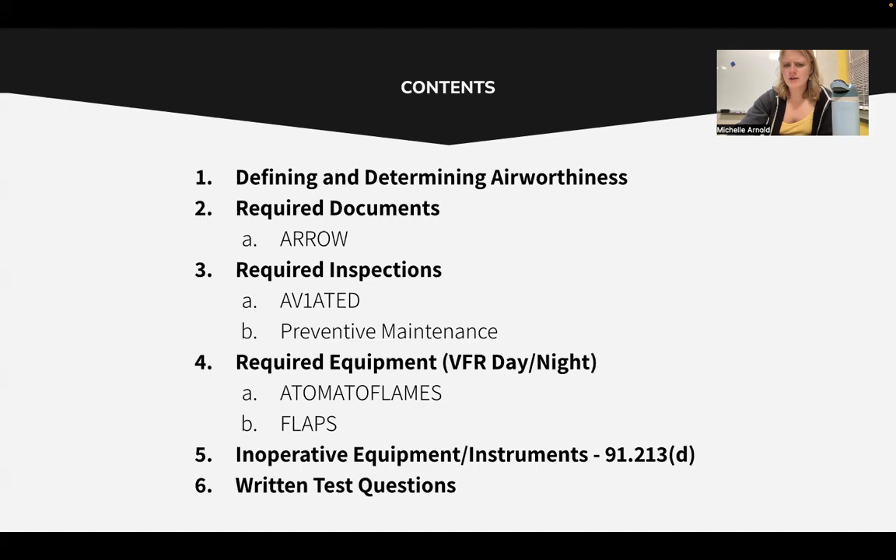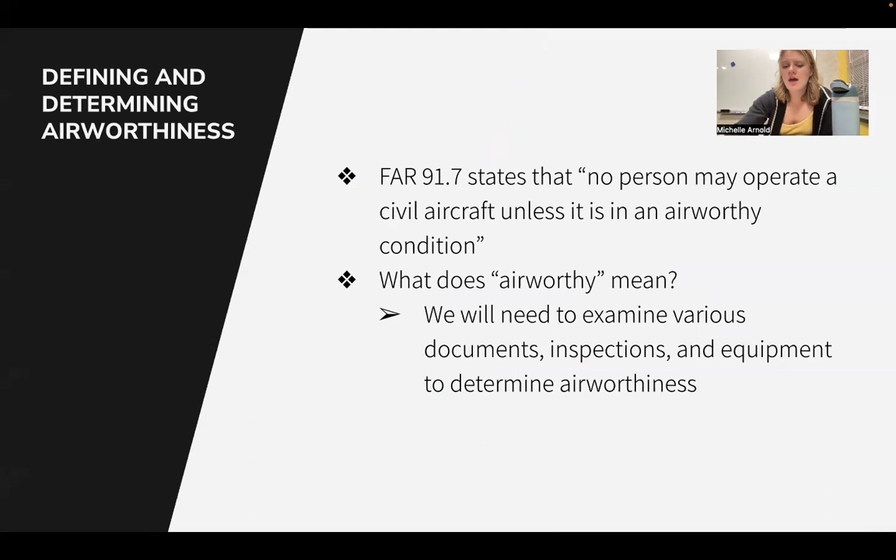All right, so defining airworthiness. FAR 91.7 says no person may operate a civil aircraft unless it is in an airworthy condition. So what does that mean to be airworthy? It pretty much just means that your aircraft is safe to fly and it's complying with any type certificate, things like on your type certificate data sheet.

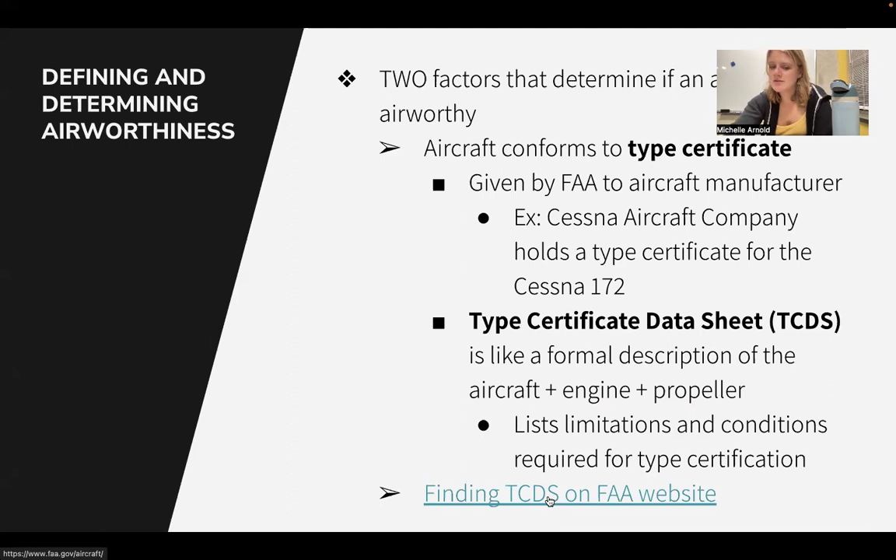So to find your type certificate data sheet, you can go to the FAA website. Click on this link, scroll down to technical information, and you have this link here, type certificate data sheets. Click on that, go to TC holder. We're going to choose Piper because we're going to find the Piper Archers that we use at Purdue. We are the PA 28-181. I'm going to click on that, click apply, and then it's right down here. You can click on that.

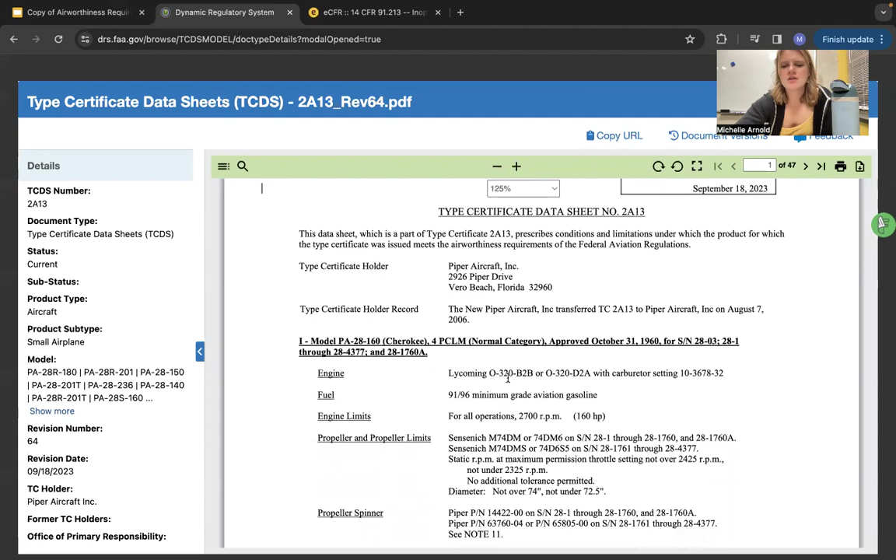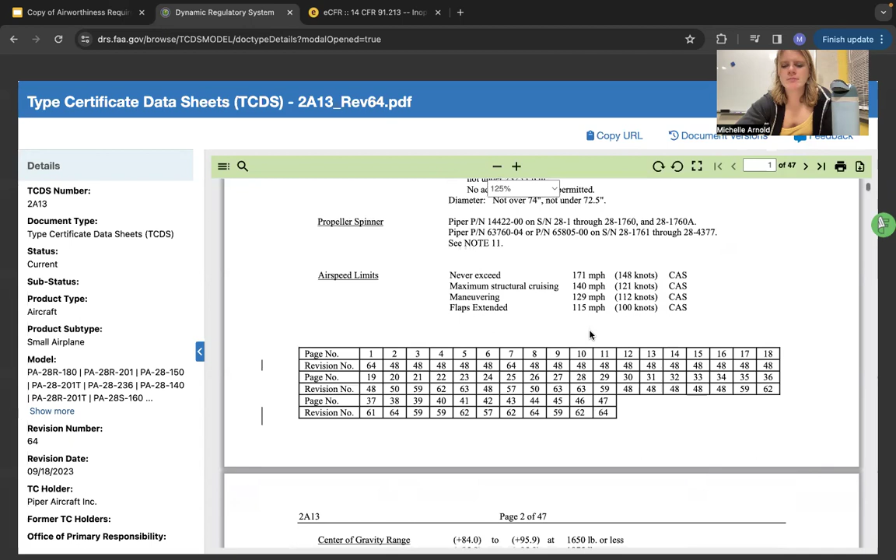And this will tell you everything about the aircraft and what you need to comply with. So we've got a Lycoming, horizontally opposed 320 B2B. Got all of our V speeds.

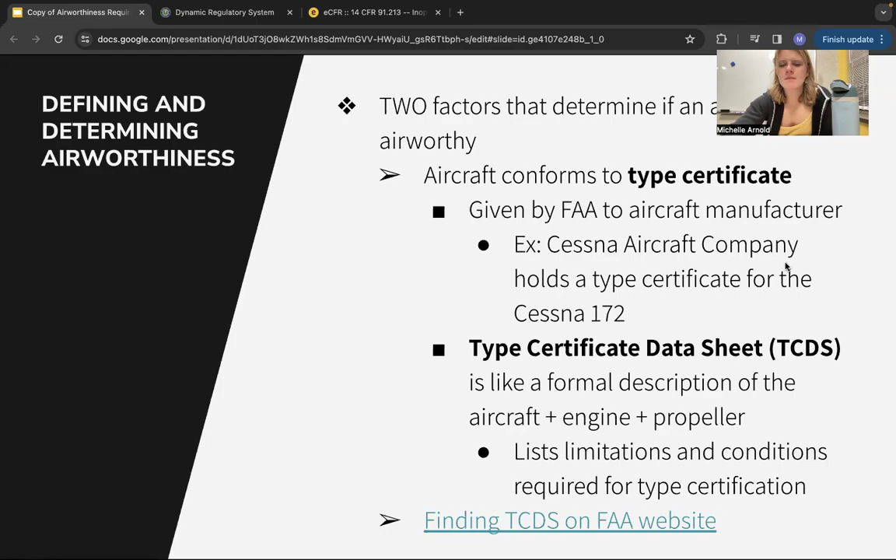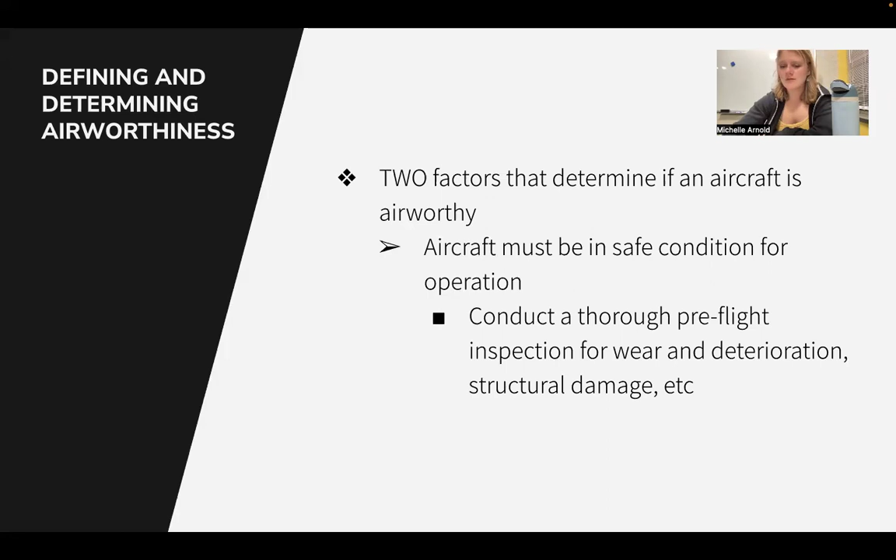So the two factors that determine if an aircraft is airworthy: it must be in safe condition for operation. So do a thorough pre-flight, make sure you check everything, follow the checklist that Purdue gives you, and make sure there's no damage or anything wrong with the plane. Make sure there's enough oil, enough gas.

And then the person responsible for maintaining the airworthiness condition is the operator and owner, but the pilot in command is responsible for ensuring that it is safe. So doing the proper pre-flight, the pilot in command shall discontinue the flight if it is unairworthy.

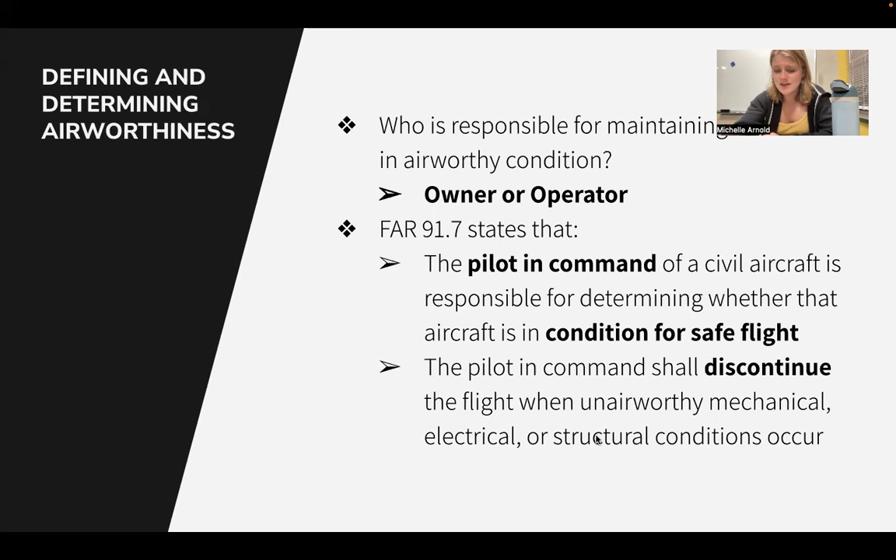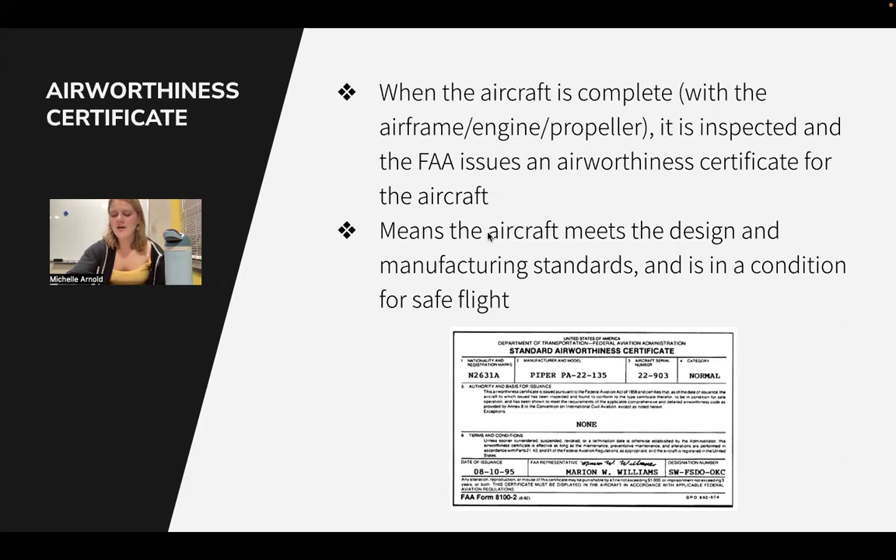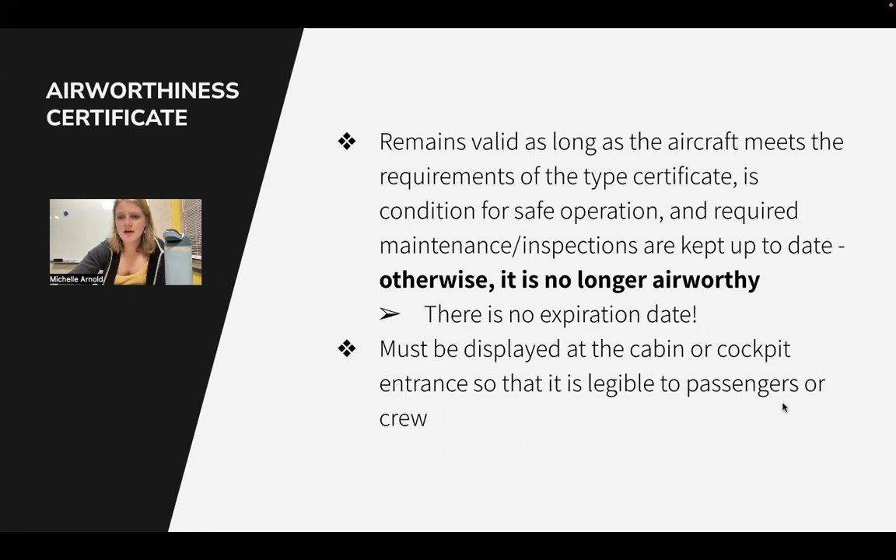All right, so the airworthiness certificate. This comes with each aircraft. It means the aircraft meets the design and manufacturing standards and is in condition for a safe flight. So each aircraft will have one of these and it does not expire. It's good for life. If you don't have it, the airplane is no longer airworthy. And it has to be displayed in a position that both the passengers and crew can see it.

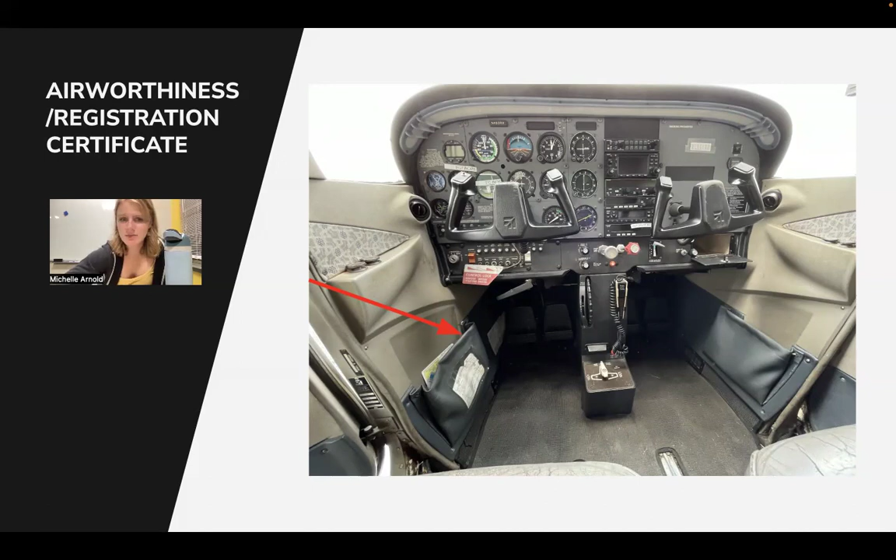Your radio station license. So we don't really need to worry about that because we are not going to be going outside of the contiguous 48 states. But if you are, you will need a radio station license. It's issued by the Federal Communications Commission, so not by the FAA.

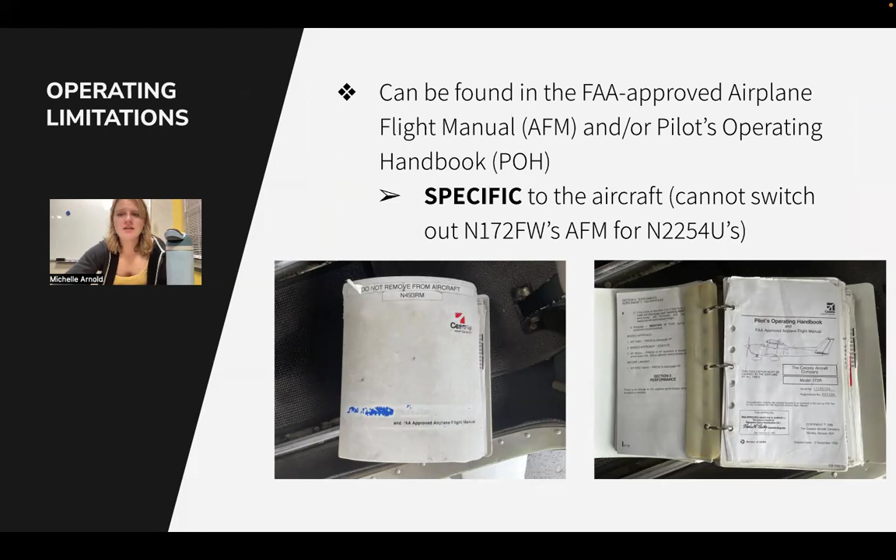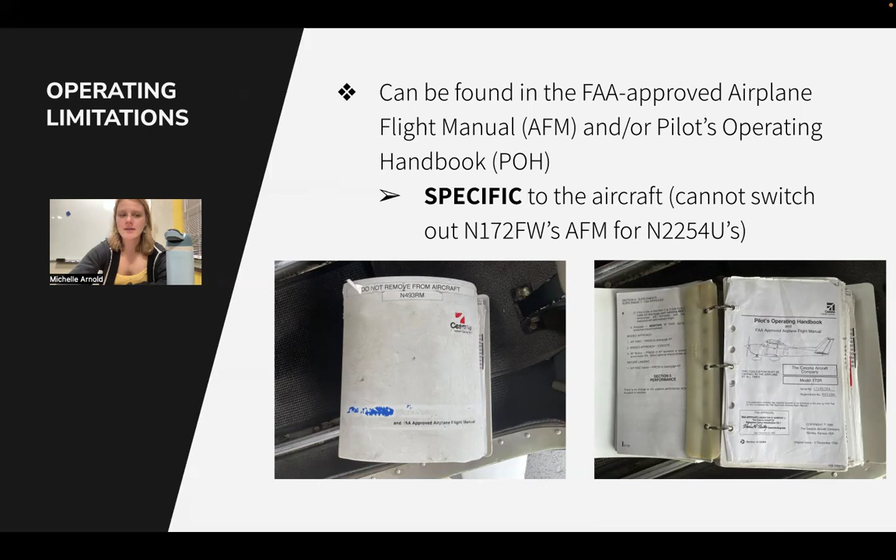All right, so your operating limitations. These can be found in an FAA-approved airplane flight manual or the pilot's operating handbook. Ours is probably going to be in the pilot's operating handbook, but this is specific to the aircraft. This is why Larry doesn't like to hear operating manual, because say the Piper's POH is on the website and that's the same for all Purdue planes, but the operating limitations are going to be a little bit different for each specific aircraft. So you can find all of these in the plane, in the binder, in the back seat.

All right, weight and balance data. That's our W. This again is going to be very specific for all aircraft, and that can also be found in the back of the binder.

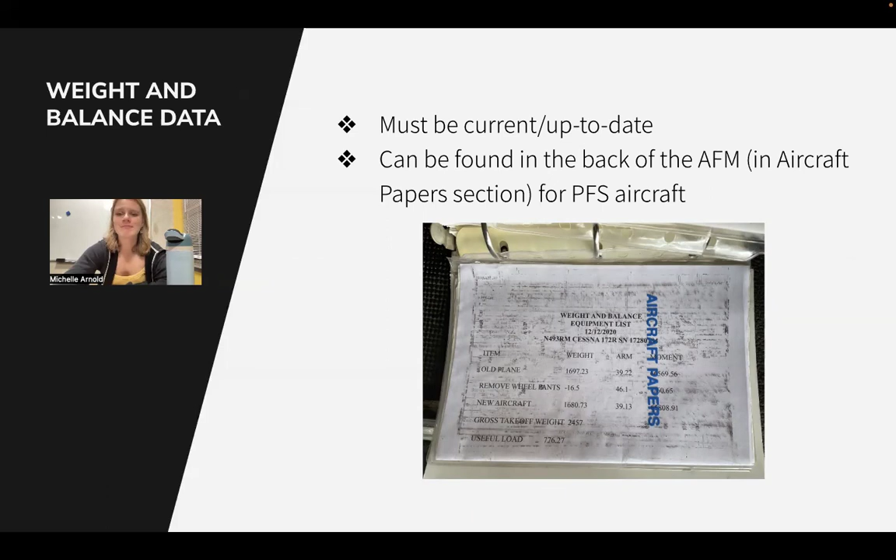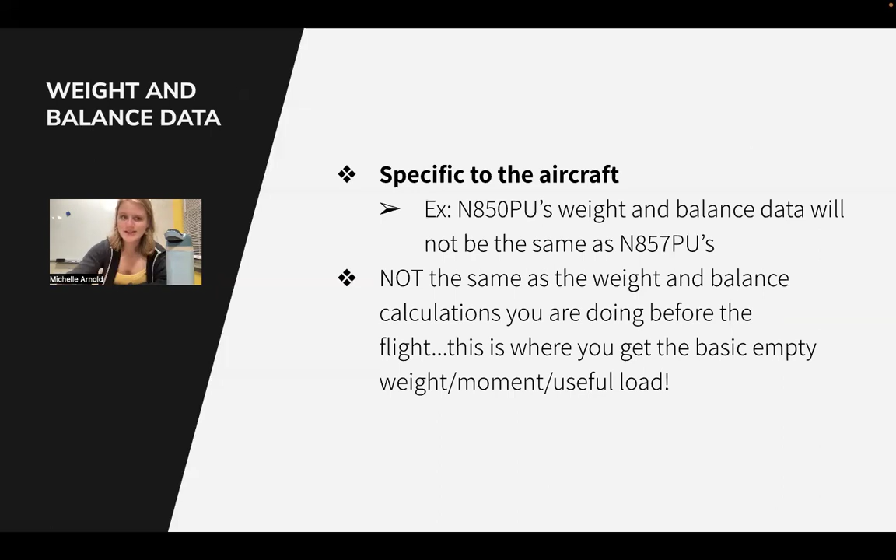Purdue 50's weight and balance data is not the same as Purdue 57's. Whenever I calculate weight and balance and I don't know what plane I'll be in, I actually use Purdue 57 because it's the heaviest of all Purdue's aircraft. But you can find the weight and balance data, the basic empty weight, for each of Purdue's airplanes on the Purdue Flight Ops website.

Now, required inspections. You need these documents, and you need to make sure all of these inspections are completed before each flight. You can use the acronym AV1ATED, or some people use AVIATE, and instead of having the D for airworthiness directives, they just have another A.

So the first A is the annual inspection. The VOR check is for instrument use only, so for VFR flight we don't need the VOR inspection. Then you've got the 100-hour inspection, altimeter and pitot-static system inspection, transponder, your ELT, and making sure you've complied with all airworthiness directives.

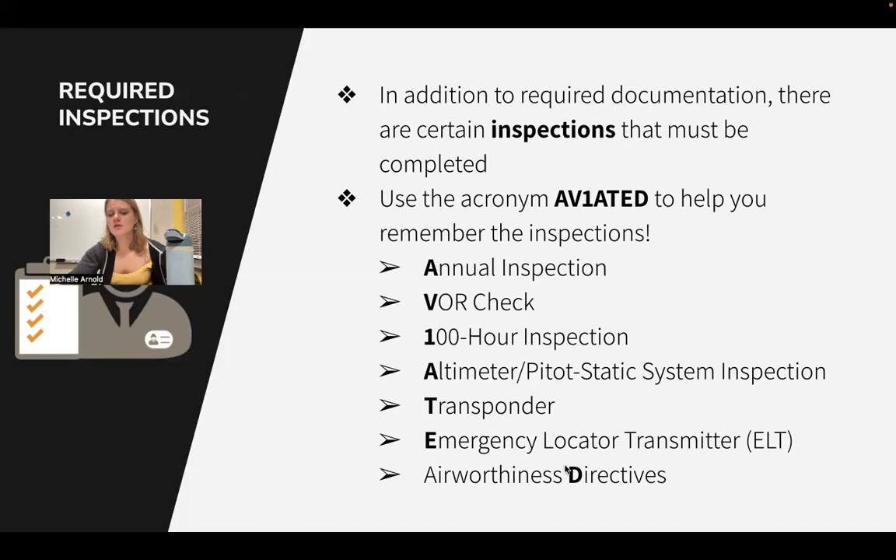Your annual inspection is pretty much what it sounds like. You need it every 12 calendar months. It can only be completed by a mechanic endorsed with an inspection authorization, or IA. This is a complete inspection of the aircraft and engine.

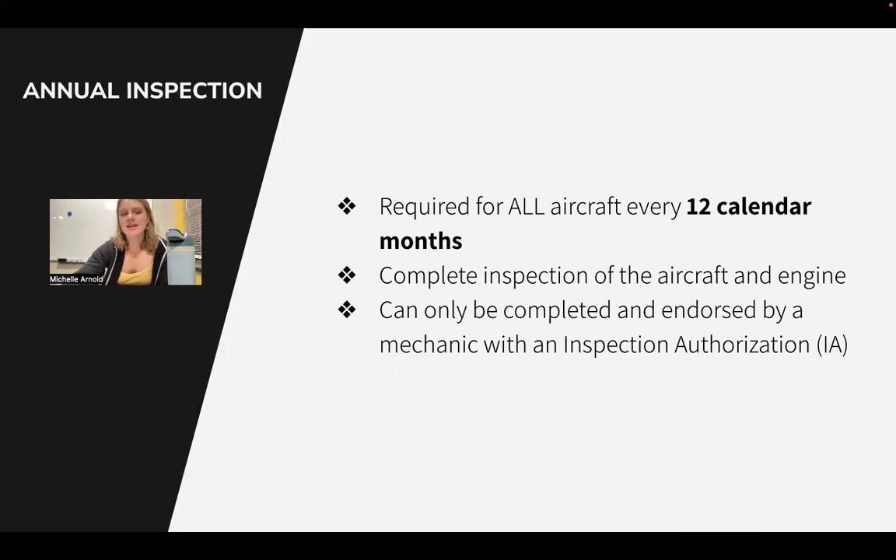So your annual inspection, you need it once a year, and if you pass the 12 calendar months, you can fly with a special flight permit only to get to a location to perform the annual inspection. The special flight permit is issued by the FAA to an unairworthy aircraft that is still safe for flight.

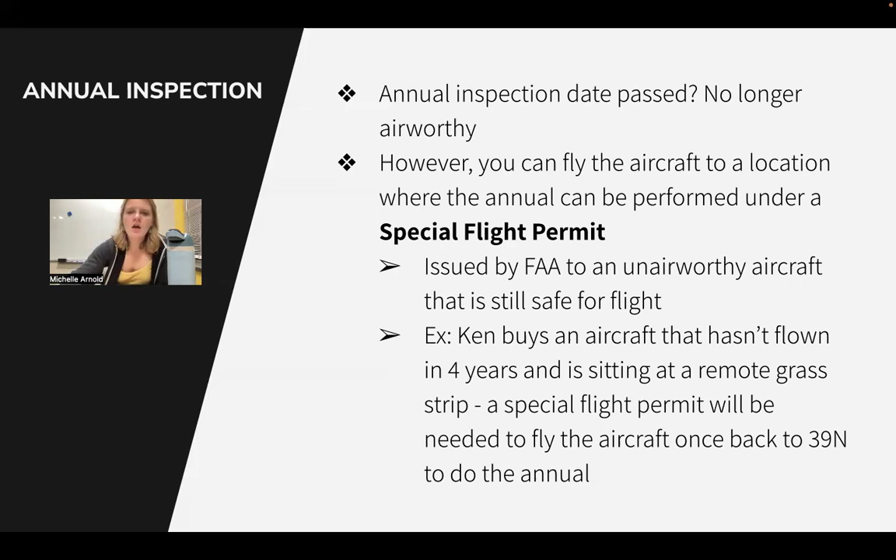All right, the VOR check. This is every 30 days instead of every 12 calendar months, and it's only needed for IFR flight. This can be performed by a pilot. You're going to record the date and the type of VOR check done—say they did a dual check and it was less than 2 degrees off the 259 radial—and then it gives that VOR.

Yeah, so this has got to be logged in the binder in the back of the plane at Purdue, in the Purdue planes, just like all the other inspections.

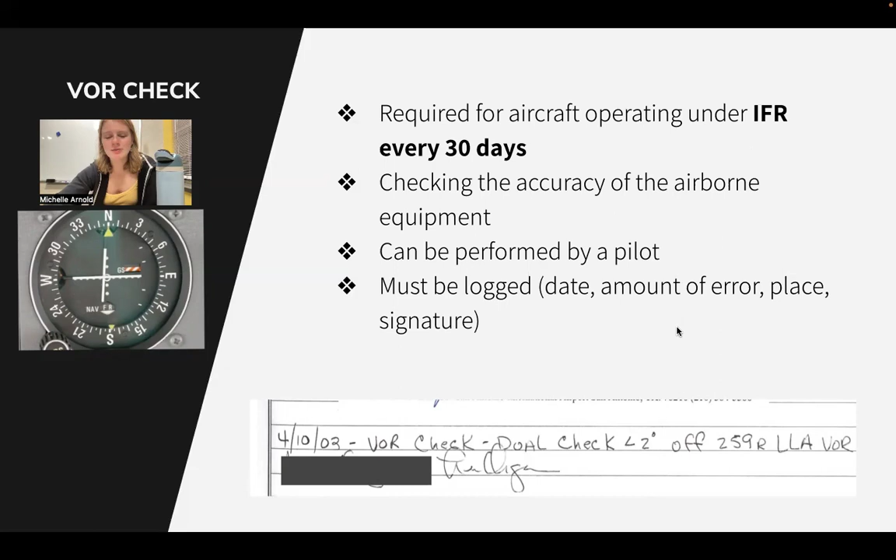All right, the 100-hour inspection. You only need it for aircraft being used for hire. So if you're just flying around for fun, for GA purposes, you don't need the 100-hour inspection. But at Purdue we do, because we're using them for flight training. One thing to note is that the annual can be performed instead of the 100-hour, but the 100-hour cannot be performed instead of the annual.

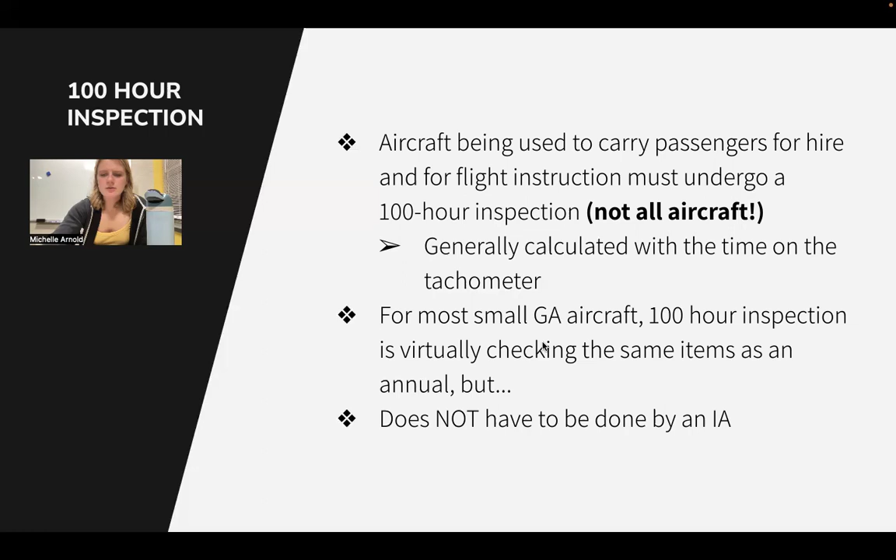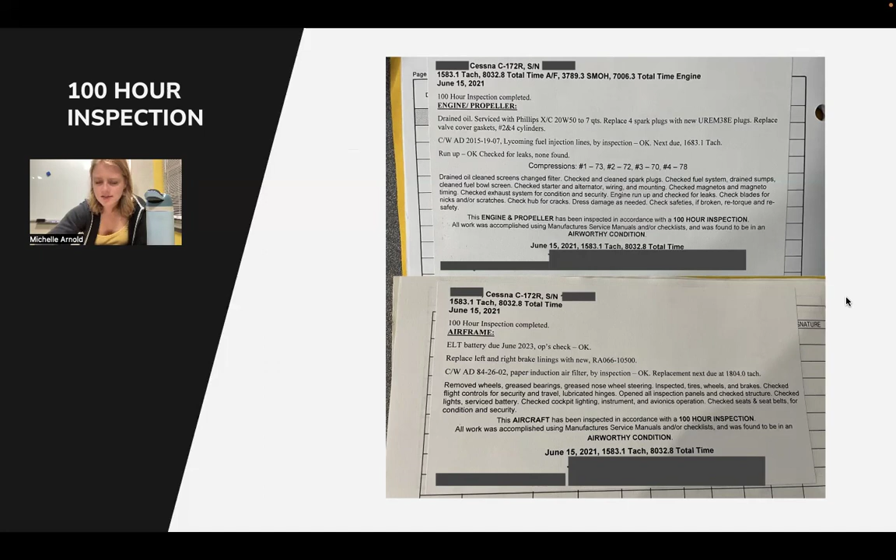This is because the 100-hour does not need to be performed by a mechanic with an IA. This is what it looks like in normal maintenance logs, and I have pictures of Purdue's maintenance logs later on in this discussion.

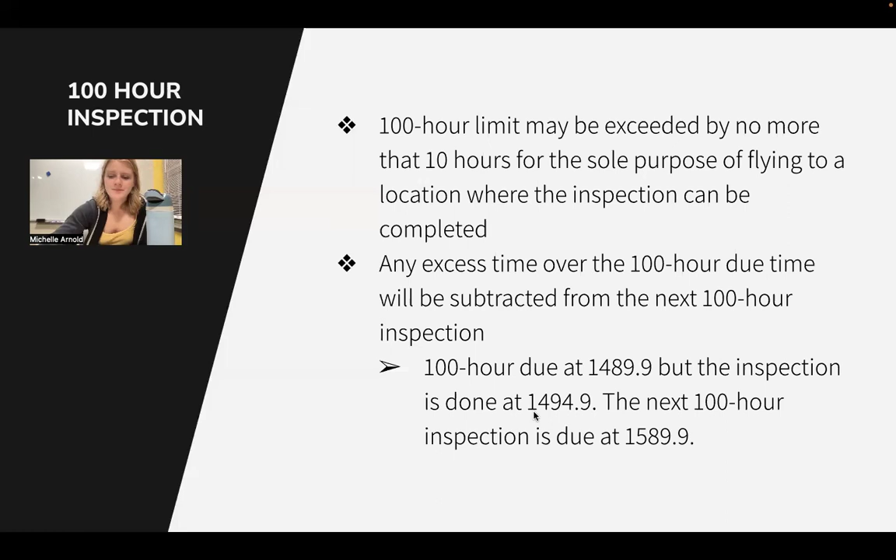The 100-hour inspection cannot be exceeded by more than 10 hours. So say if you have a 100-hour inspection due at 1489.9 and you don't get it done until 1494.9, you still have to do the next 100-hour inspection 100 hours from when the last one was due—so you'd still need to do the next one at 1589.9. That's a common written test question.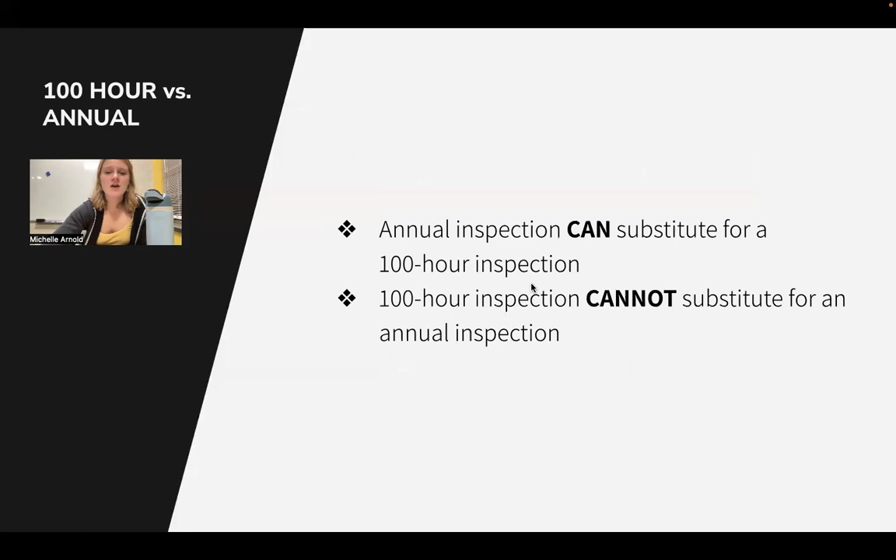Like I said, the annual can be a substitute for the 100-hour, but the 100-hour cannot substitute for an annual.

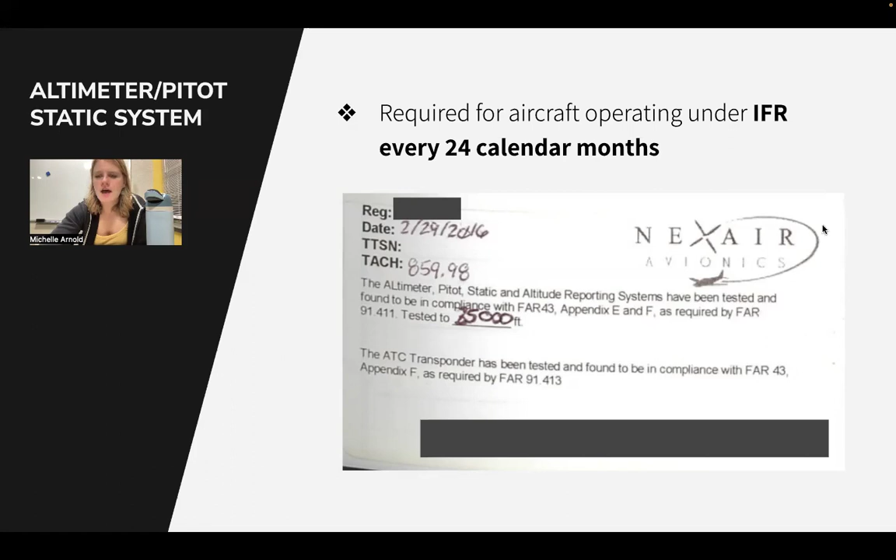The altimeter and pitot-static system inspection is required every 24 calendar months. It's usually done more often than that, and we'll get into when Purdue does theirs.

Transponder, same thing, every 24 calendar months. You're going to need a transponder if you're in Class A, Class B, Class C airspace, or over 10,000 feet, or in the Mode C veil.

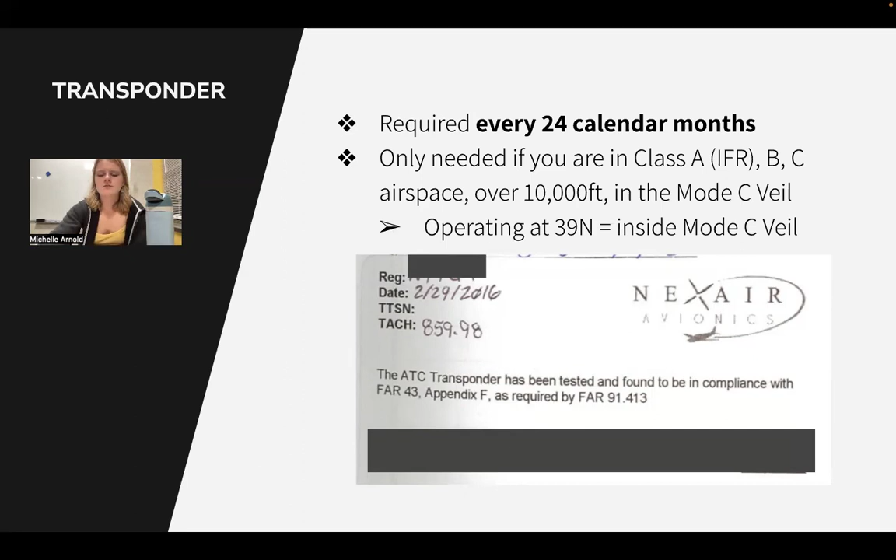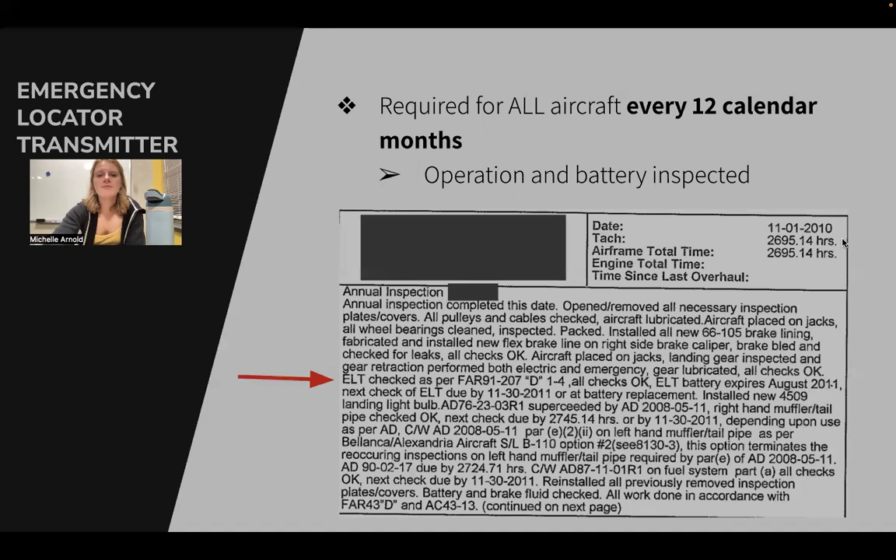And then your ELT—this is required for all aircraft every 12 calendar months to be inspected, and you might need to replace it if you've used it for more than one cumulative hour, or if you've used 50% of its useful battery life, then you need to replace it.

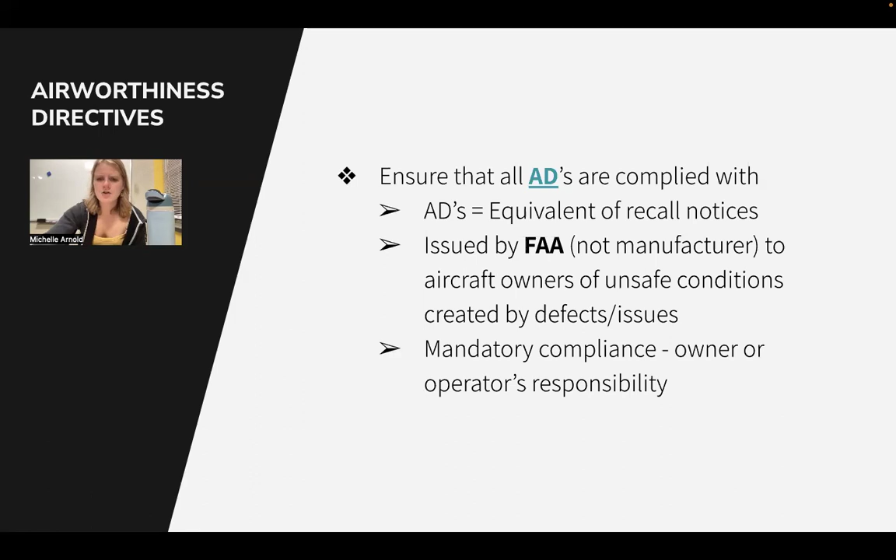And then airworthiness directives, our last one. Make sure all airworthiness directives are complied with. These are issued by the FAA, not the manufacturer, with special things to comply with to ensure it's safe. You've got two different types: recurring and non-recurring. Non-recurring you just need to do once, so we shouldn't need to worry too much about that. Recurring, you need to do it every certain number of hours or certain number of months. I'll show some examples of Purdue's airworthiness directives.

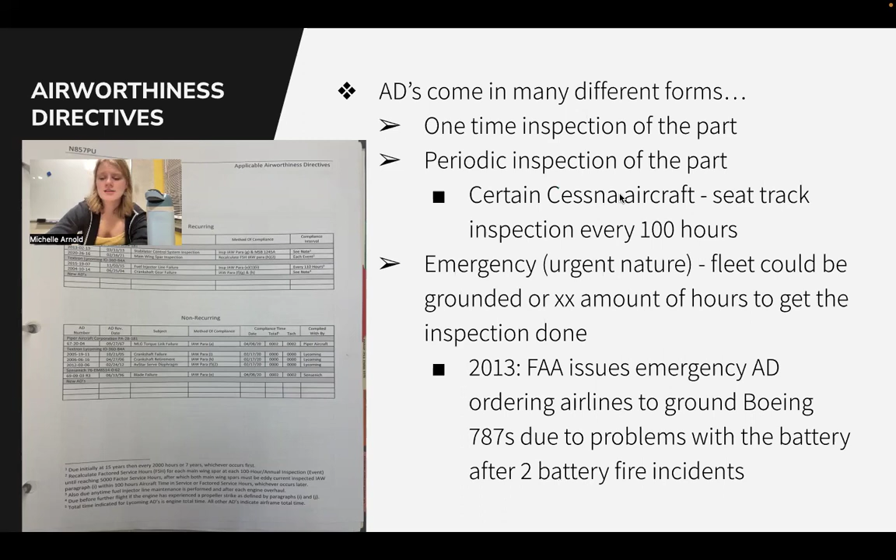Airworthiness directives come in many different forms: one-time inspections of the part, periodic inspections of the part. Here are a couple examples, but we won't go into those. I'll go into examples with Purdue's program instead.

One thing that Purdue does is progressive maintenance, so all of those inspections we do are part of this program. This is on Purdue's website, and it would be good to have downloaded onto your iPad. This is definitely something you're going to need to talk about on the check ride.

Every 50 hours we do a routine inspection, which includes oil change, oil filter, brake reservoir check, propeller inspection, operational check, tire and brake inspection, and operation check of lights, pitot heat, and stall warning. Then every 100 hours you have an event, and you have 4 events until you do the entire cycle over again.

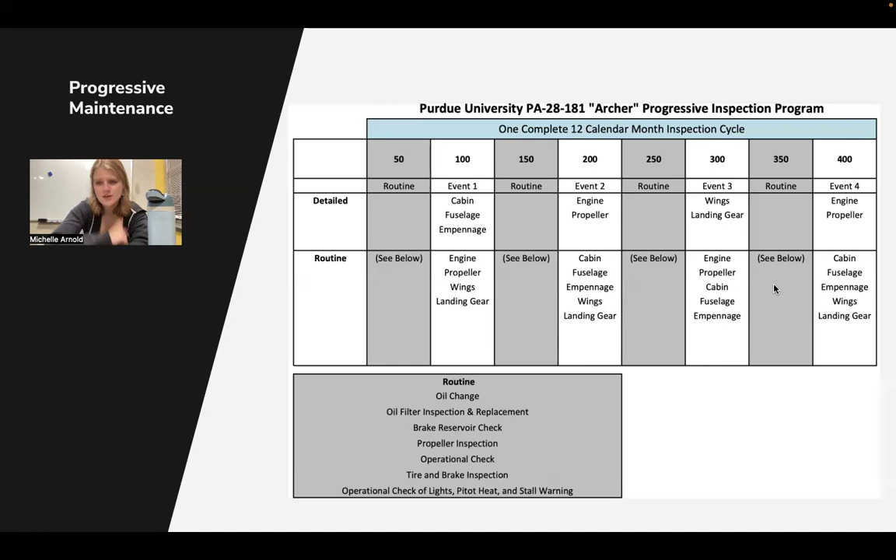Event 1 covers cabin, fuselage, empennage. Event 2 covers engine, propeller, and they also do all these other things. So you do an event every 100 hours, and every 4 events you have a cycle.

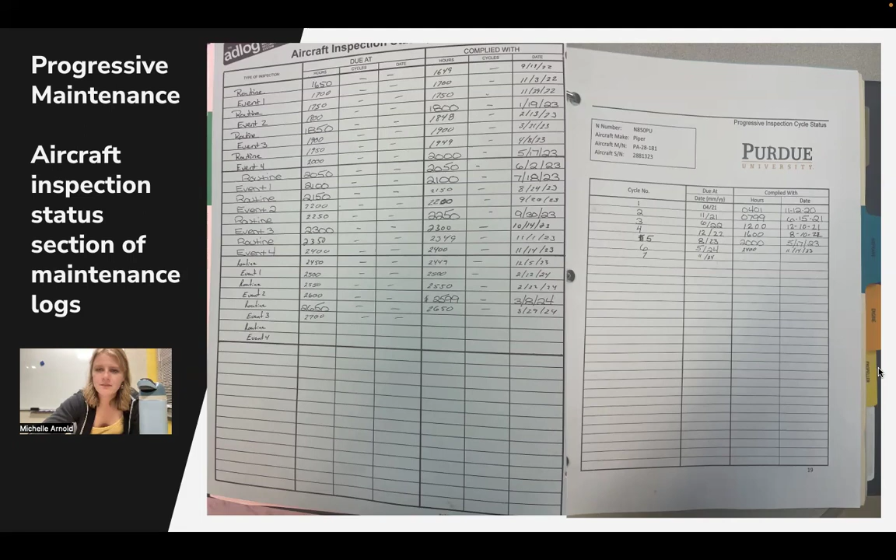In the airframe section of the maintenance logs, you can find the other inspections. Most of the important ones they have highlighted. Here we have that the ELT inspection occurred and it's due for replacement 07/2026. Then on the right here, we've got another one.

This one is a little bit tricky. Here on the bottom, where my cursor is, is actually the transponder and altimeter inspection. It says altimeter here, but it does not say transponder—instead it says 14 CFR 91.411 and 91.413. That is the transponder and altimeter inspection. So that's kind of hard to find; you've got to really look for it and be ready to point that out on your check ride.

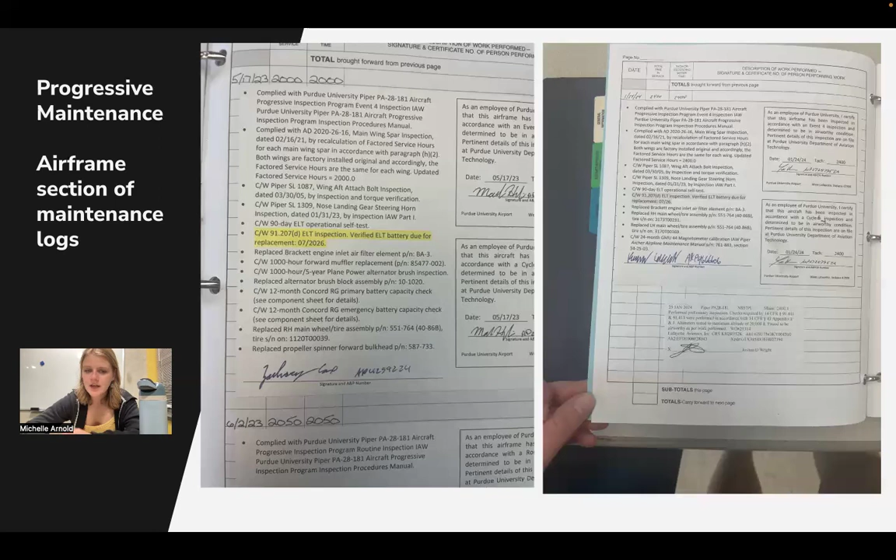Luckily, we don't have to go to the maintenance logs every single time before we fly, because when dispatch gives you your key, it'll have this card in it that tells you what cycle you're on and when all of your inspections are due. You just take a look at that card and make sure they're all up to date, and you should be good to go.

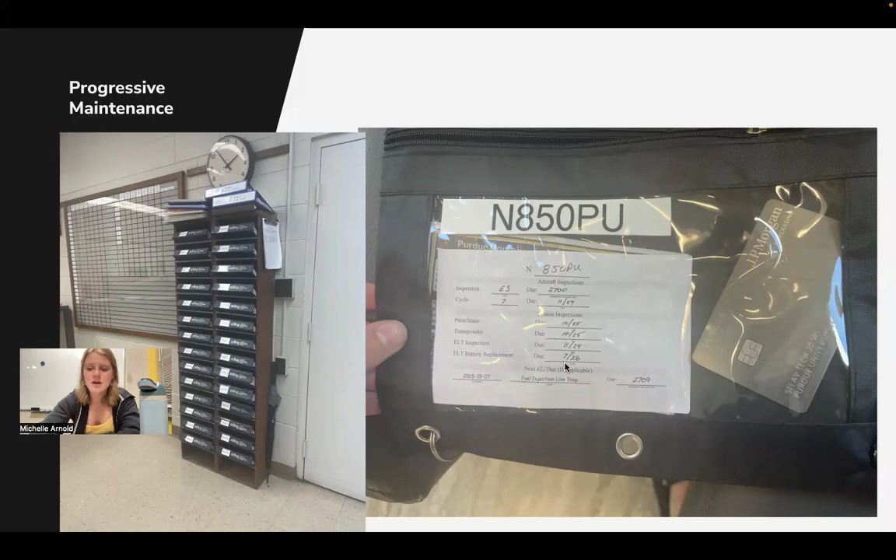Preventative maintenance is simple or minor maintenance operations that can be done by certificated pilots. If you have your private pilot's license, you're allowed to do preventative maintenance. You can replenish hydraulic fluid, replace safety belts, replace or clean spark plugs, replace a landing light bulb. One thing we do routinely is add oil to the plane—I think that can be considered preventative maintenance.

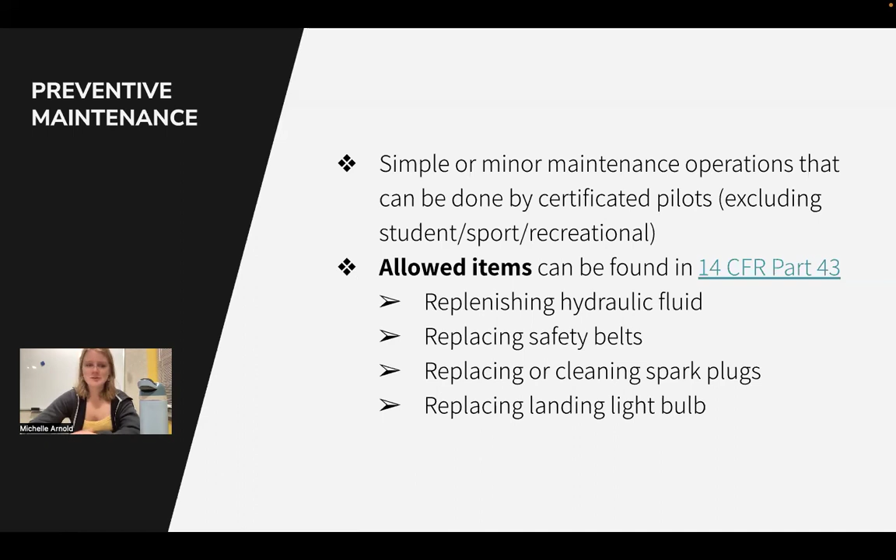A lot of these things, like replacing and cleaning spark plugs, don't do unless you're comfortable and confident that you can do them. You can also click on this link and go to this website, scroll down to part C—sorry, I got an ad popping up—scroll down to part C, preventative maintenance.

Preventative maintenance is limited to the following work, and you can look at this list. If the maintenance you want to do is not on this list, don't do it—get a mechanic to do it.

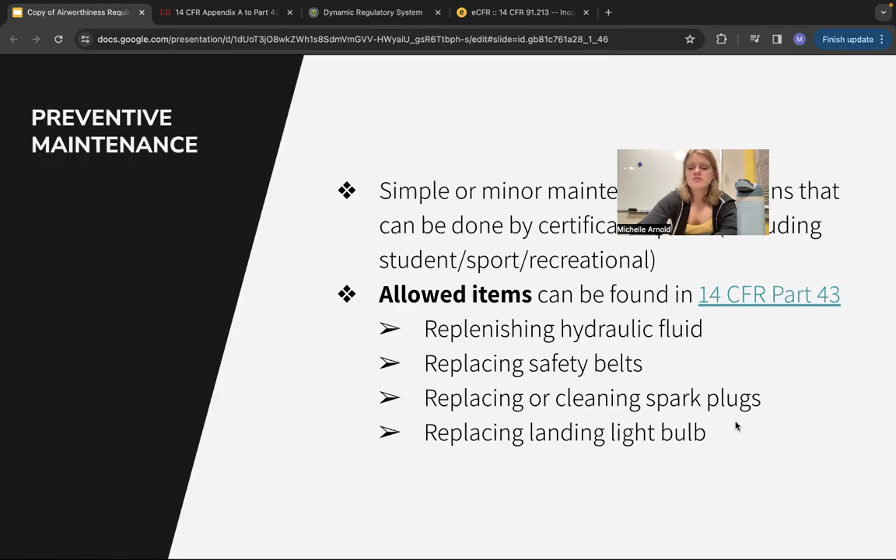If you are performing any maintenance, you must record it in the maintenance logs. Write a description of work, date of completion, and then your name, your certificate number, and the type of certificate held. Here's just an example down here.

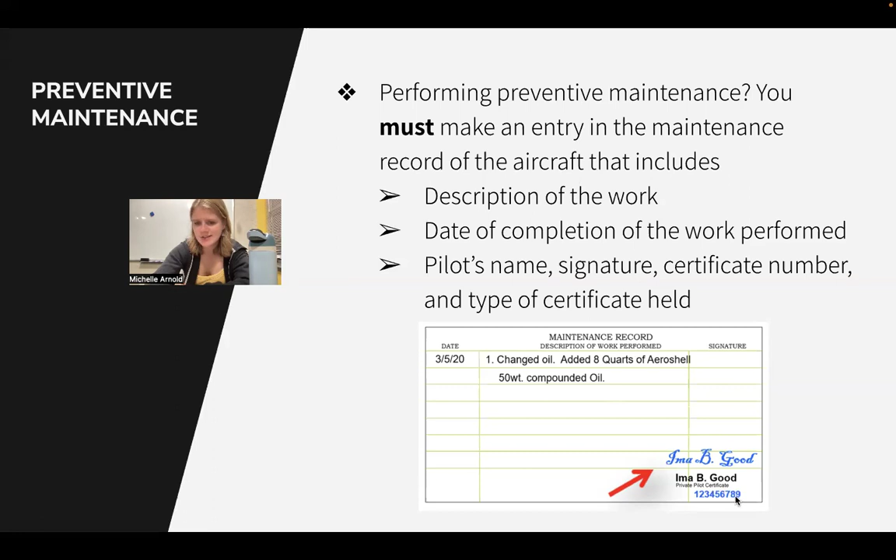Required equipment for VFR day and night: Day VFR, A TOMATO FLAMES; Night VFR, FLAPS. Those are acronyms we're going to use, and you'll definitely get to know them pretty well throughout your training. Those can also be found in 91.205. I would also memorize that number, because if you're in a check ride scenario, or if you just need to know what your required equipment is, you can look that up really quick in your FAR/AIM to get that list.

So for A TOMATO FLAMES, we've got the altimeter, the tachometer, oil pressure gauge, manifold pressure gauge, airspeed indicator, temperature gauge, oil temperature gauge, fuel gauges, landing gear position indicator, anti-collision light system, magnetic direction indicator, emergency locator transmitter (ELT), and your safety belts. One thing I'll note: the magnetic direction indicator in a lot of aircraft is going to be a compass, but in the Piper Archers we do not have a compass—instead we have a magnetic direction indicator, and that's in the ADAHRS for the G1000.

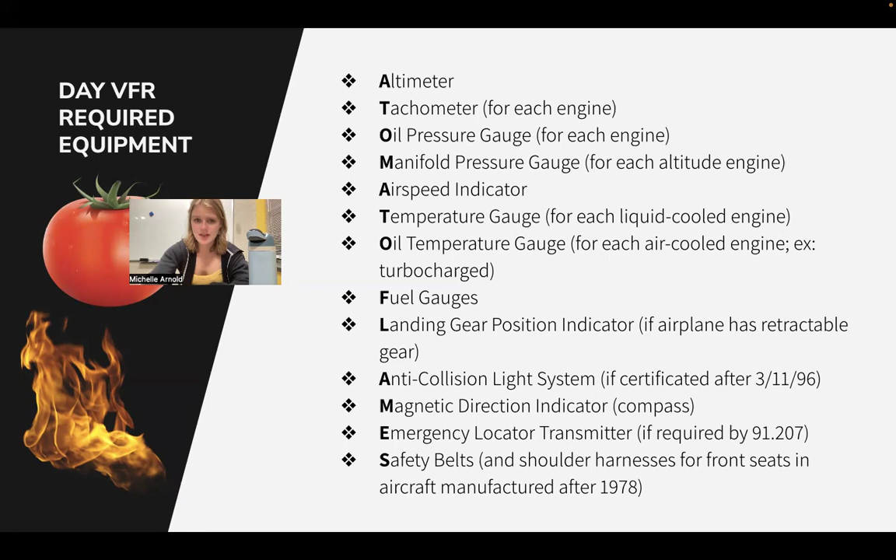All right, and then we also have flaps. This is for night VFR. So for that, we have fuses. This is not required if the aircraft uses circuit breakers. So we have circuit breakers, so we do not have fuses. Landing lights, anti-collision light system. So that is on here twice, if you notice that. Got the position lights, which these are just our nav lights, and then a source of electricity. And in the aircraft that we fly, the Piper Archers and in a Cessna 172, that's going to be an alternator.

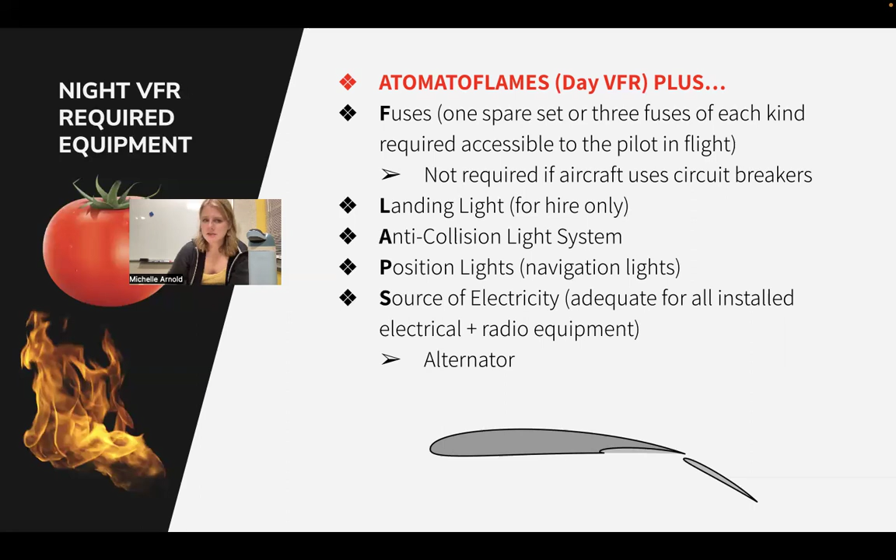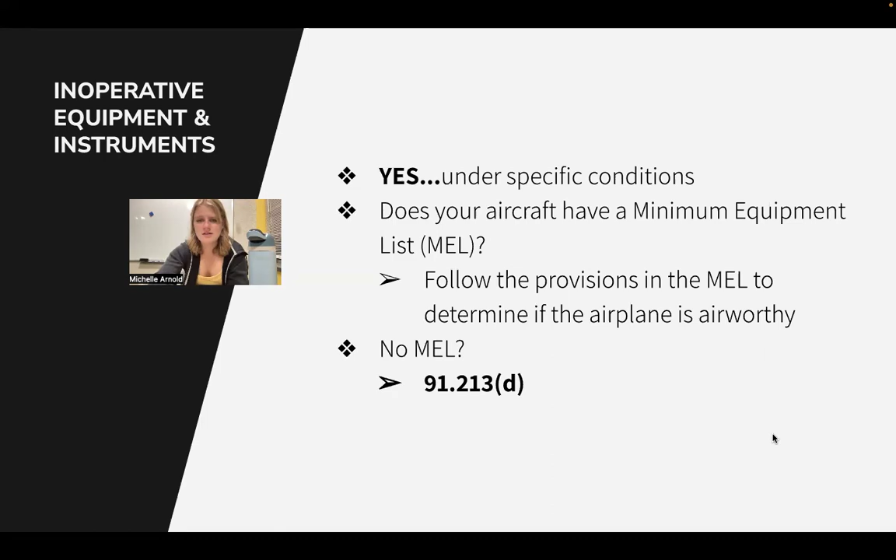Okay, so if you're doing your pre-flight inspection and you notice that one of these items is inoperative, what do you do? So first you can check to see if the aircraft has an MEL. The Piper Archers do not have an MEL, but you can see if they do, and if not, you can go to 91-213, section D, and it's going to ask you a couple questions. If it does have an MEL, and an MEL is the minimum equipment list, see if that piece of equipment is on the minimum equipment list. If it is not, then you are okay to fly.

But if your plane doesn't have an MEL like ours, you ask yourself the following questions. Is it in 91-205, TOMATO FLAMES? So say that your landing lights aren't working. So it is required by 91-205. Is it an airworthiness directive or is it in a KOEL? KOEL can be found in the POH, in section 6 of the POH with the weight and balance. Is it a VFR day type certification? If you answered yes to any of these questions, the plane is not airworthy.

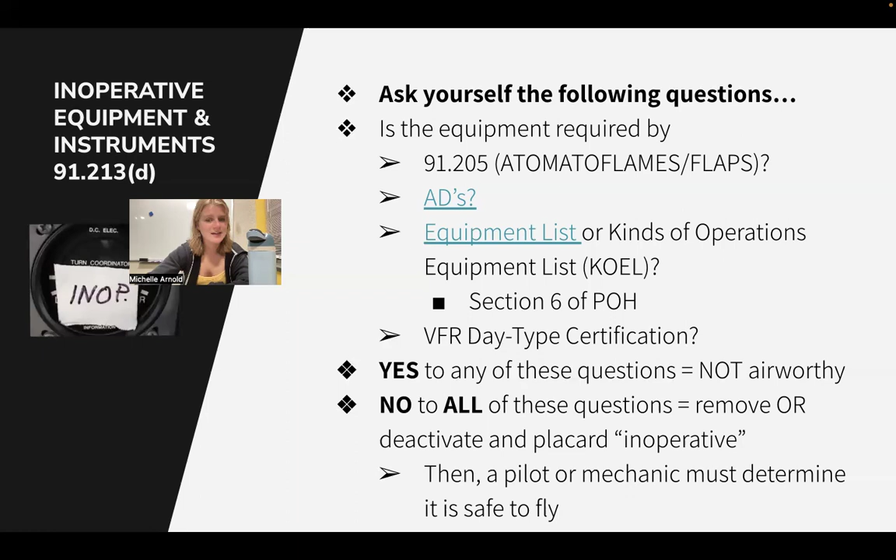If you answered no to all of these questions, you can remove it or you can deactivate it and placard it inoperative. And you would have to go see the mechanic to do this and then put it in the maintenance logs. But that is something that we can do. I know that on one of the Purdue planes, the fan is inoperative. And since we don't need that, they just placard it inoperative and we just don't use it.

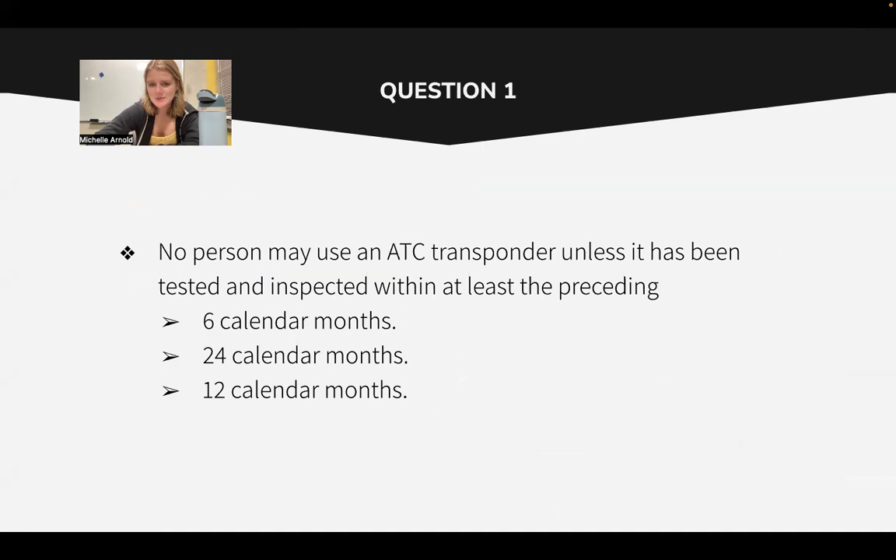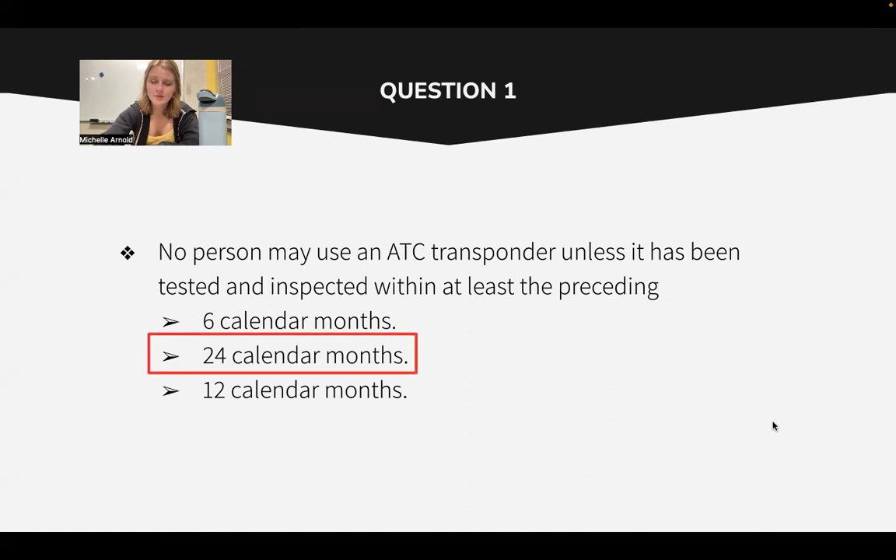Okay, so here are a couple sample written test questions. First one, no person may use an ATC transponder unless it has been tested and inspected within at least the preceding... You guys remember what it is? It is 24 calendar months. So the transponder and the altimeter is 24. The ELT is 12. VOR is 30. So yes, 24 calendar months. That's just a memorization thing.

An aircraft's annual inspection was performed on July 12th this year. The next annual inspection will be due no later than, so we know it's going to be the next year. It's not going to be on the 13th. It's 12 calendar months. And what that means is you go to the end of that month. So since there are 31 days in July, it's going to be July 31st of the next year.

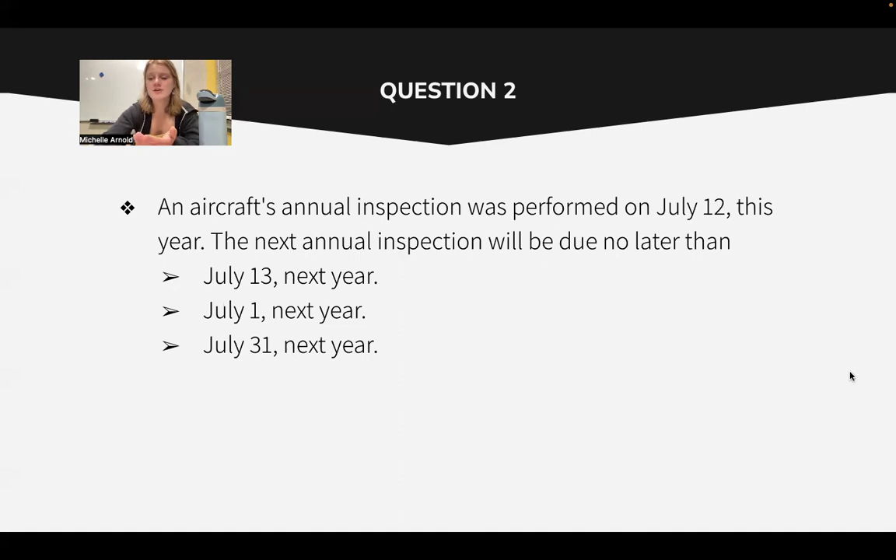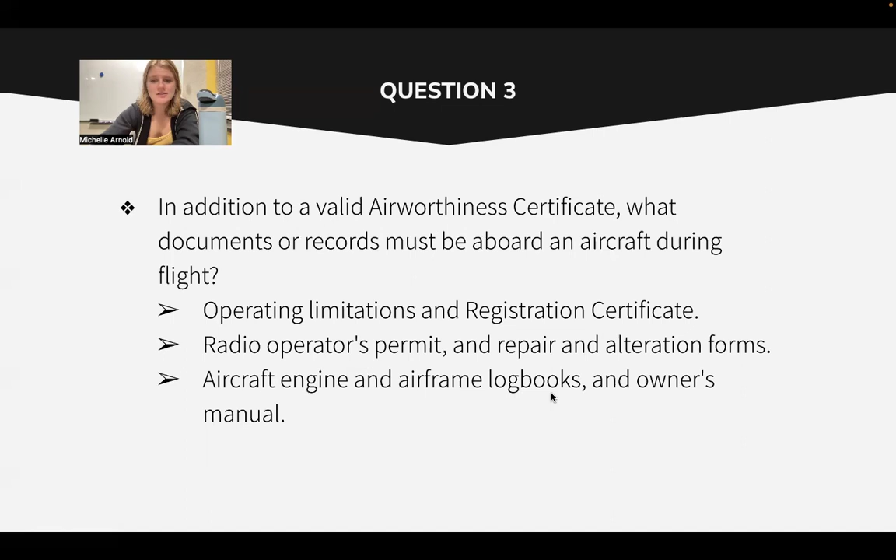In addition to a valid airworthiness certificate, what documents or records must be on board an aircraft during flight? So, operating limitations and registration, yes. Radio operator's permit and repair and alteration forms. You do not need repair and alteration forms. And you do not need the engine and airframe logbooks. So it's going to be this first one.

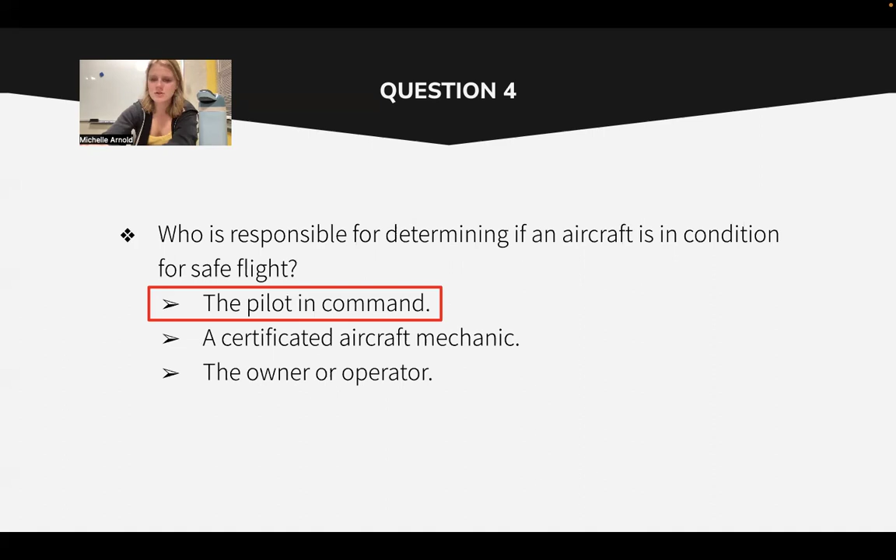Question 4, who is responsible for determining an aircraft is in condition for safe flight? So this is going to be the pilot in command. The owner operator is responsible for making sure that the plane is airworthy, but the pilot in command needs to ensure that it's in condition for safe flight. So those are two different things. And the pilot in command does this by performing a thorough pre-flight.

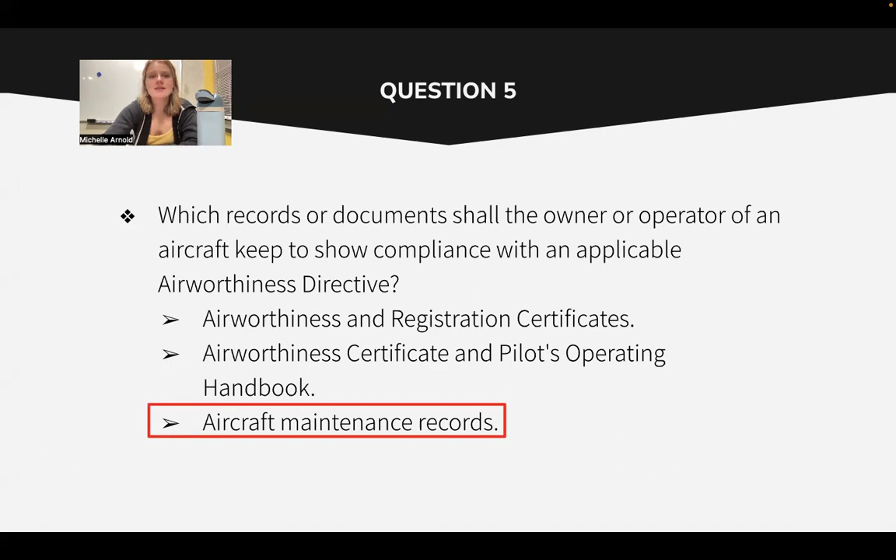Which records or documents shall the owner or operator of an aircraft keep to show compliance with an applicable airworthiness directive? Okay, so there are 3 options, and it's going to be the aircraft maintenance records. And these are all located in Hangar 6 in those stacks of books for each of the planes.

All right, preventative maintenance has been performed on an aircraft. What paperwork is required? So you're gonna need the date the work was completed, name of the person who did it, and you're also going to need their certificate number and their signature. So I think it's this middle one. I know it's this middle one.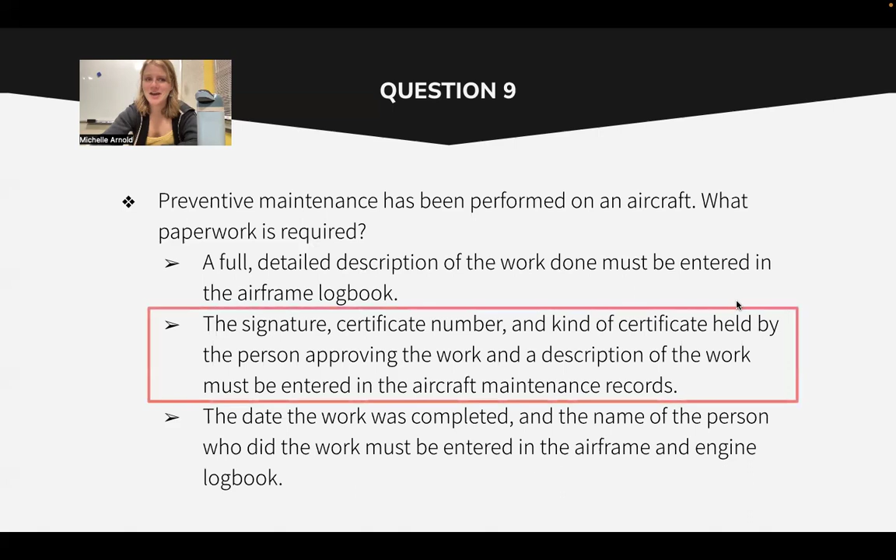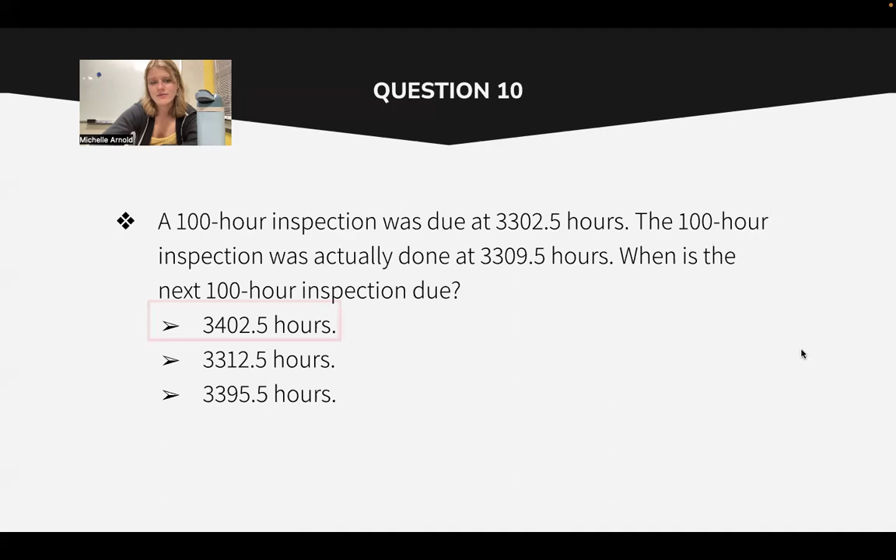All right, 100-hour inspection was due at 3302.5. The 100-hour inspection was actually done at 3309.5 because you have that 10-hour grace period. When is the next 100-hour inspection due? It's not at 3409.5, that's for sure. It is going to be 100 hours later than this, which is at 3402.5. All right, here we go.